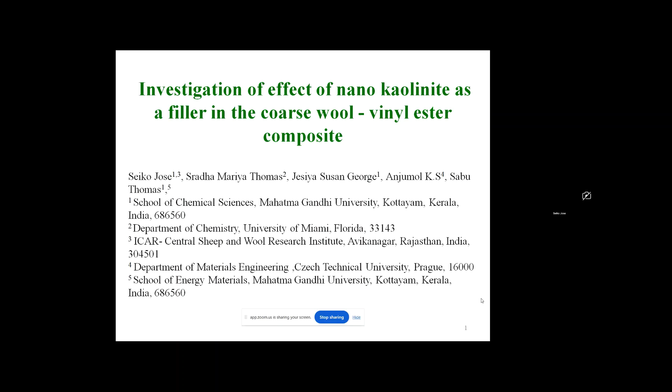There are different breeds of sheep that are available in India and all over the world. So many types of sheep wool are of no use as far as textile material is concerned. There are three types of wool fibers available. We can classify them into three grades. First one is fine wool that can be used for apparels or textiles.

Second one is the medium coarse wool that can be used for the fabrication of carpets and blankets. And the third one is a highly coarse wool that is not utilized for any good purpose. So my objective is to utilize this type of very highly coarse wool to give a value addition to it. These are some of the popular sheep breeds in India which produce highly

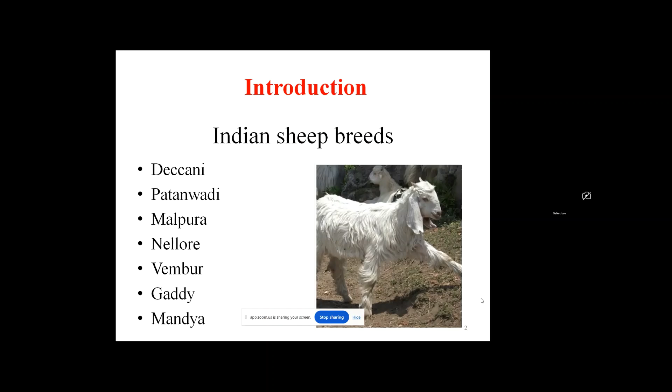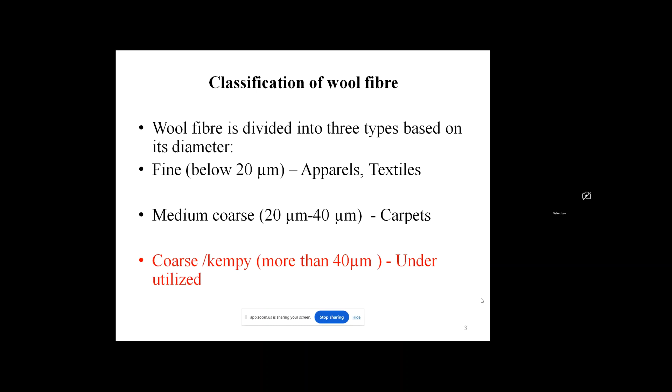coarse wool. Now, as I told you, highly coarse wool will have more than 40 microns. So this remains underutilized. So my research is to give a value addition to this particular coarse wool that otherwise doesn't have any commercial potential. So the one issue with this, as I told you, the highly coarse wool is producing 300 to 400 grams per shearing.

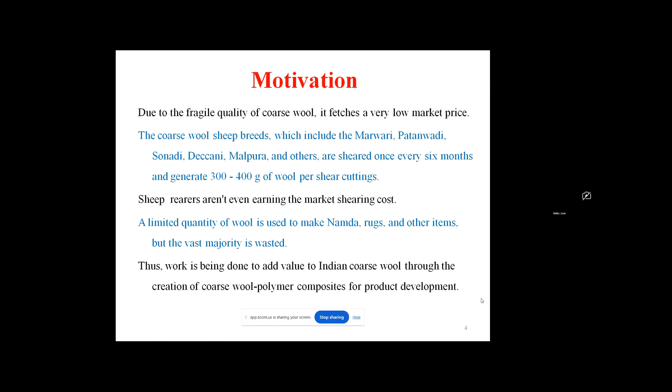Now, since it's highly coarse, it doesn't get any good price in the market. So the sheep rearers are not able to get any appreciable price. So that is the background of my research. So I have taken Patanwadi coarse wool. This has a typical micron of more than 40, and I made some composites using vinyl ester. Then I added nano kaolinite as a filler to enhance the mechanical properties of the composites.

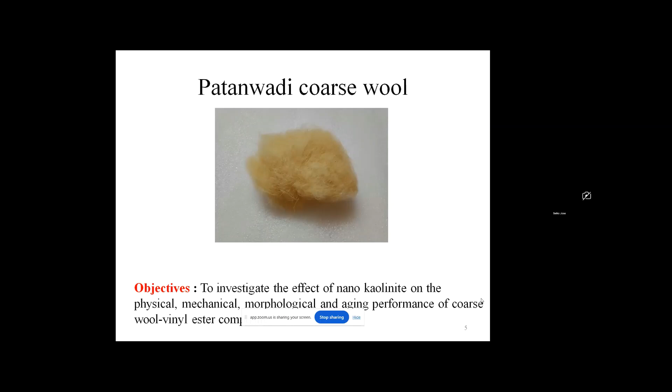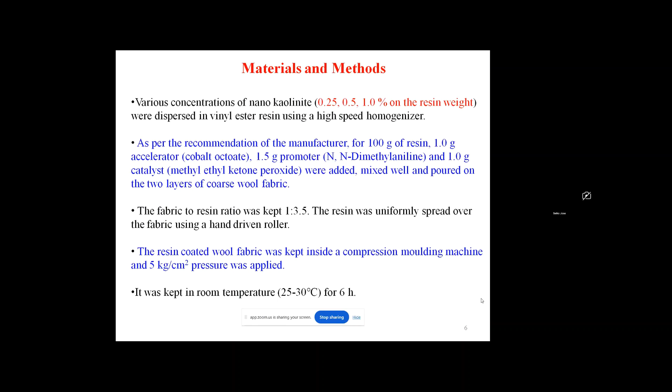So this is the materials and method. We have taken nano kaolinite in different concentrations, 0.25%, 0.5% and 1%. And the vinyl ester resin we have taken according to a 1:3.5 ratio with respect to the wool fabric. Initially we coated the wool fabric with the resin, and afterwards we compressed it in a compression molding or hot press machine at 5 kilogram per centimeter square pressure. Then it was cured at room temperature for 6 hours.

So this is a schematic diagram of the process. Initially the vinyl ester resin and nano kaolinite were mixed. Afterwards we added accelerator and catalyst for curing. We mixed that, and we coated the wool fabric with the resin along with the nano kaolinite. Then compression molding, and afterwards the composites were formed and further utilized for the characterization.

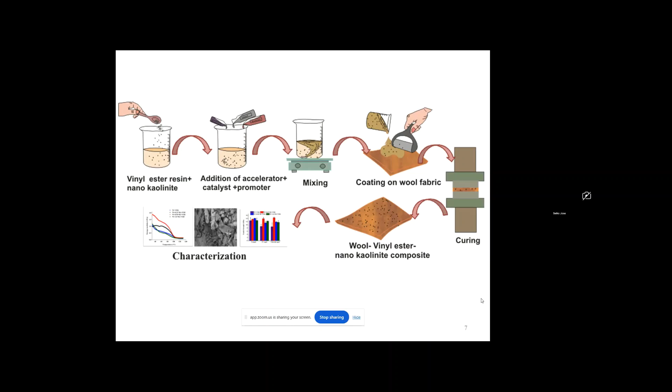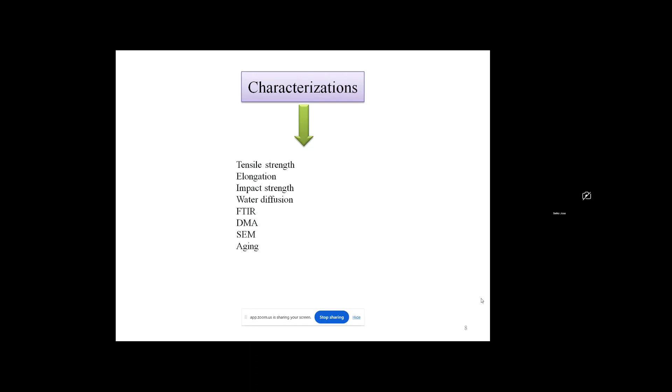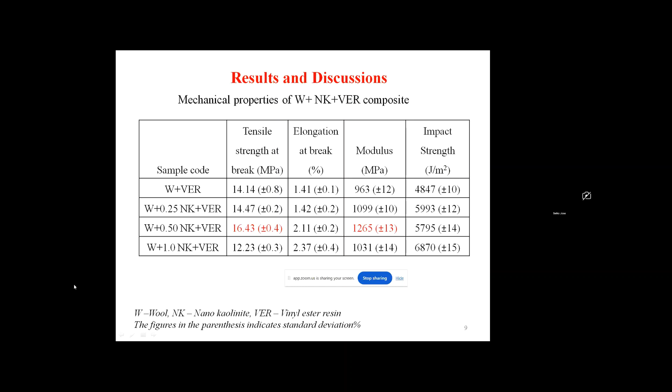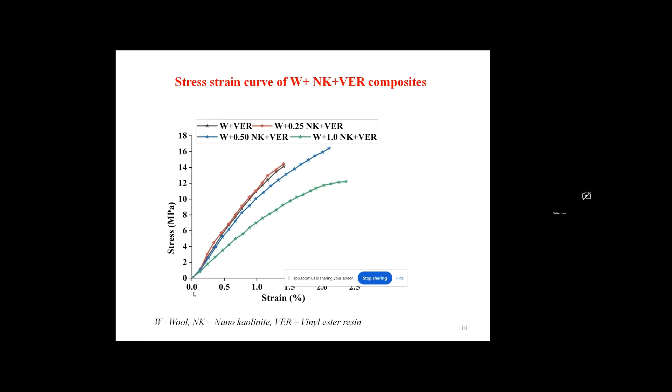Now coming to the next, this is the stress strain curve of these composites. Here also you can see the blue color, that is the 0.5%, is having the highest stress, ability to withstand the force.

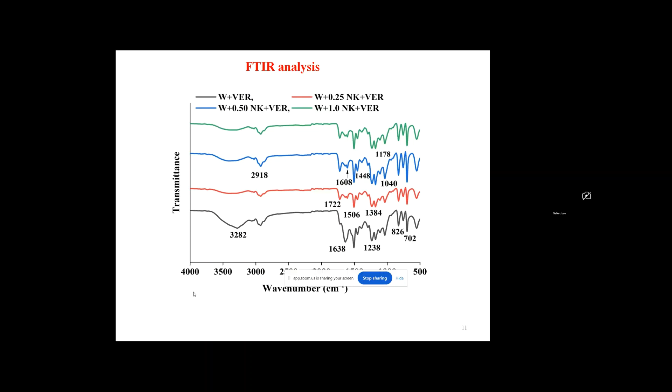This is the FTIR analysis of all these composites. So here we found that there is no chemical bond formation between the resin and the wool fiber, because the resin is hydrophobic in nature and the wool fiber is hydrophilic in nature. So there is no scope for making a chemical interaction. In fact, it is a physical adhesion. That is the reason behind the strength of the composites.

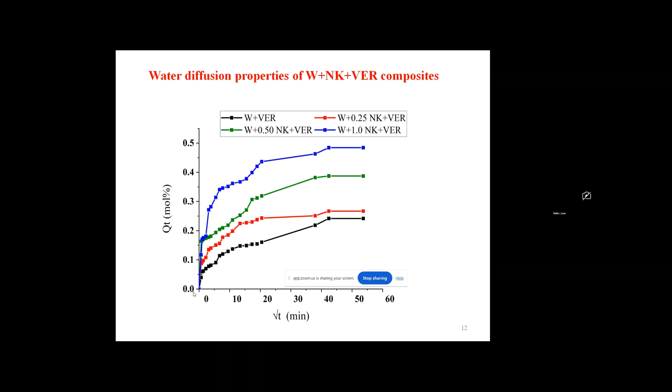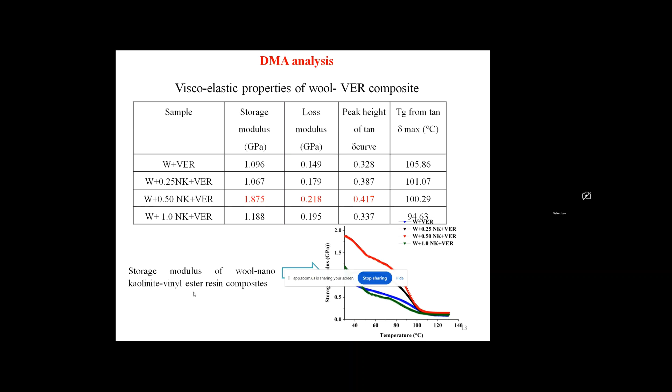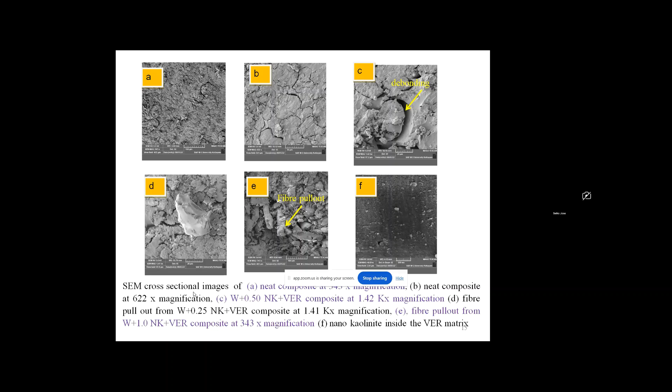So we also checked the biodegradation due to soil degradation, how much weight is lost during the soil degradation test. So we made an accelerated soil degradation culture, and we buried the samples. And after 120 days, we took the samples out and weighed the composites again.

Now we find that the biodegradation is very minimal. Even though the wool fiber is highly biodegradable in nature and it is a natural fiber, the thick coating of vinyl ester resin is preventing the attack of microbes. As a result, we are getting a minimal amount of biodegradation. Weight loss is very minimal. At maximum it is 2.4% only.

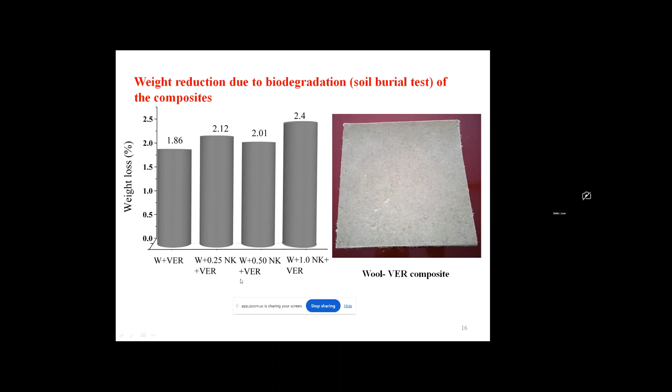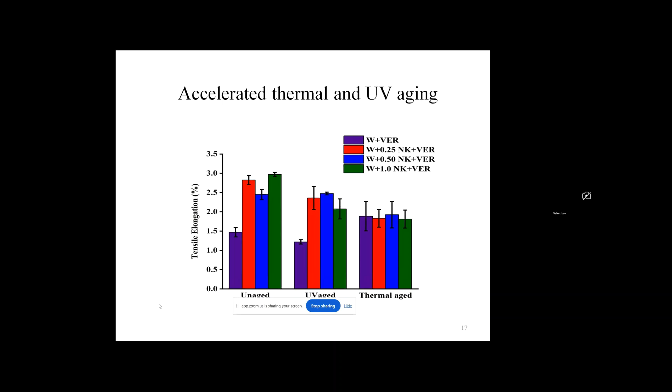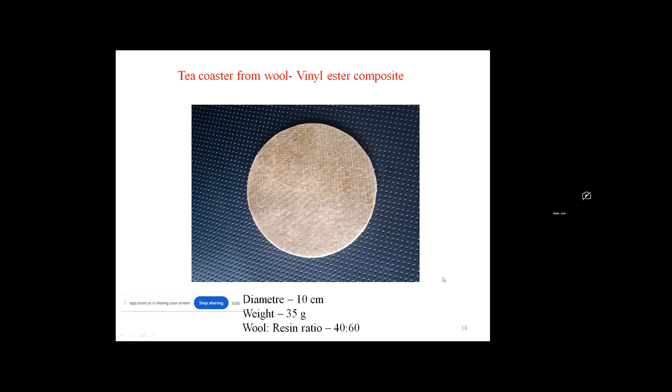So coming to the conclusion, we made biocomposites from coarse wool and vinyl ester resin. Inside that, we added nano kaolinite as a filler to enhance the mechanical properties. Out of 3 combinations of nano kaolinite we added, the 0.5% nano kaolinite is showing the best result in terms of tensile strength. And aging qualities related to accelerated temperature and UV aging were found to be higher with the addition of nano kaolinite in comparison with the neat composite. Now the weight loss doesn't show any difference irrespective of the addition of nano kaolinite.

We developed some products as well, and we found that this particular material of coarse wool vinyl ester can find applications in insulation panels, because coarse wool especially is very fit for making acoustic panels and thermal insulation panels. So this type of biocomposite could find applications in the production of insulation panels.